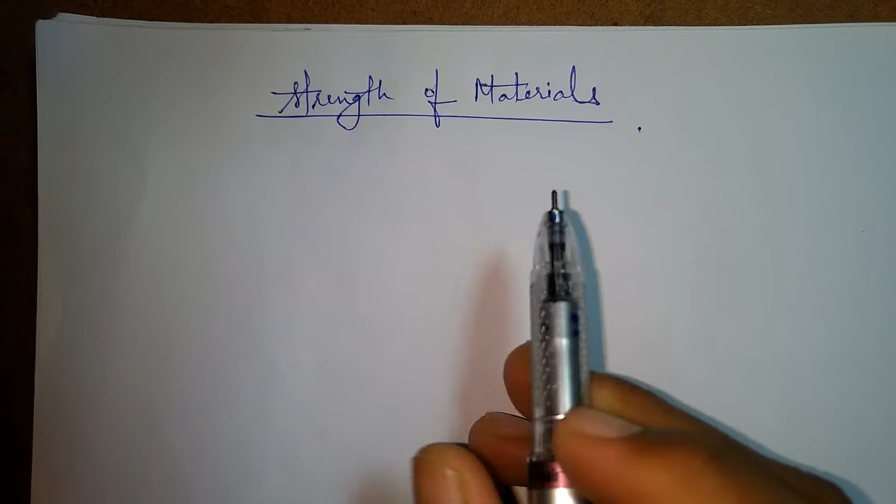So, hello everyone. Today we are going to learn about the basics of the chapter Strength of Materials, also called Mechanics of Solids. As we are engineers, it is in our hands to design, build, produce, manufacture, and use technology effectively in this modern world for our lives to go parallel with it.

As we all know, the situations or circumstances prevailing now are very much modernized. So, in order to cope with or go contemporary with the prevailing situations, it is in our hands to use the technology and use our knowledge efficiently, so there would be no failure.

So, coming to strength of materials, what is strength? Strength, as we all know, means the feeling of being strong, that we could do anything, or we could resist any attack. Yes, strength of a material means the resistance of the material to failure. Strength means the ability of a material to resist failure.

From observation, it has been known that the deformation occurs gradually. When external forces are acting on a body, the deformation occurs gradually and failure takes place. The deformation is not sudden, it is a gradual process till failure, then the failure takes place at a certain point. So, the study of the external forces, their effects, and the safe working conditions of the materials is called strength of materials. Moreover, these are mainly applied to metals only.

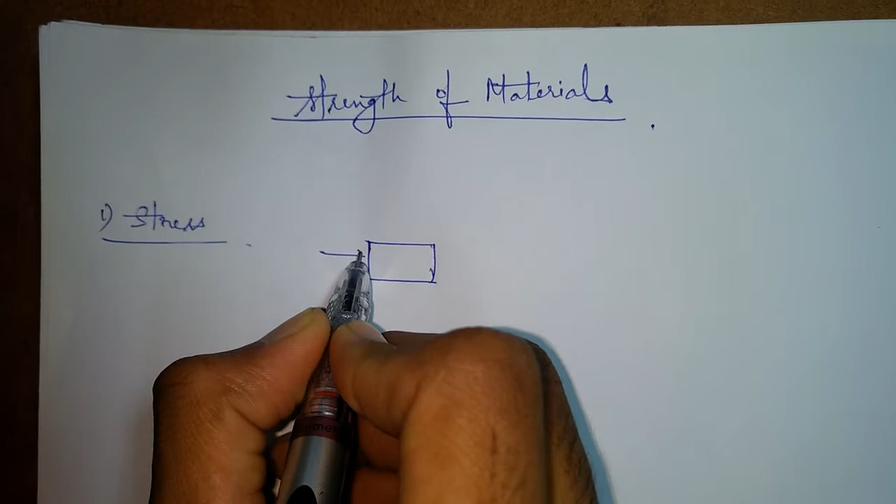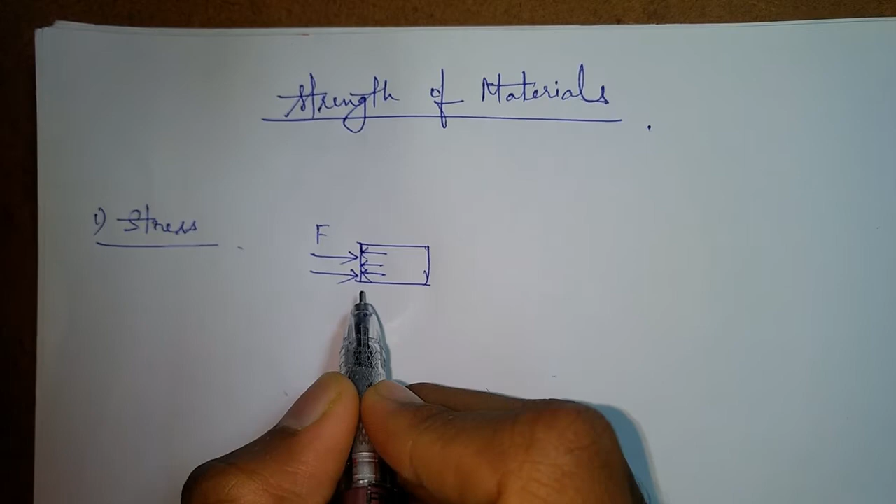As the external force is applied here, according to Newton's third law, for every action there is an equal and opposite reaction. The same applies here. For the external force being applied here, let this be F. There is a resistance developed in the interior of the body which resists the applied external force. This is nothing but stress developed in the body.

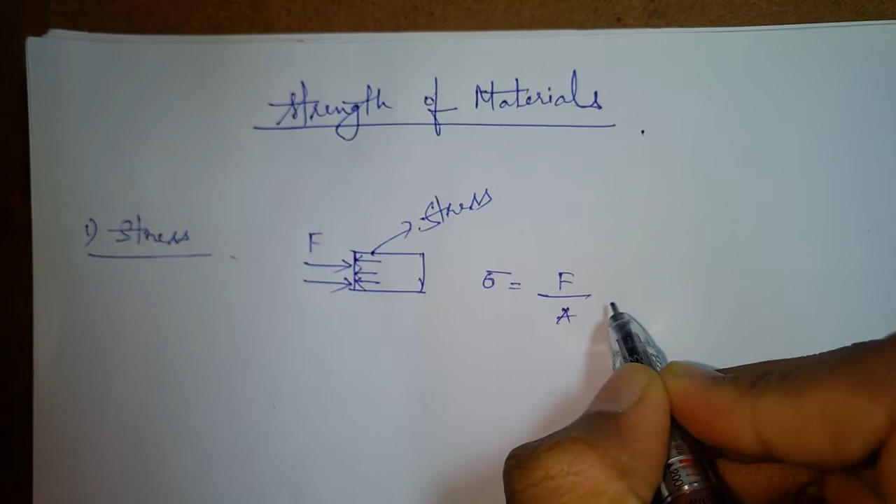Stress in common terms is nothing but resistance per unit area. Resistance that has been developed per unit area is called stress. It is represented by sigma. Stress is force per unit area, or P, load per unit area, and its units are Newton per meter square. So stress is nothing but resistance developed in the interior of the body for the external force being applied.

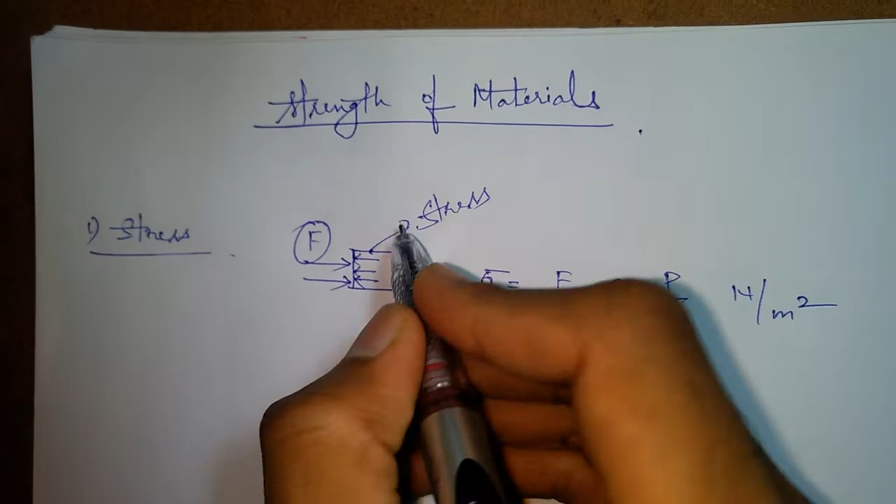If the force is greater than the stress, then deformation takes place. The body deforms. If the force is equal to the stress, then deformation does not take place, and the body will be firm as it was before. So it is called stress.

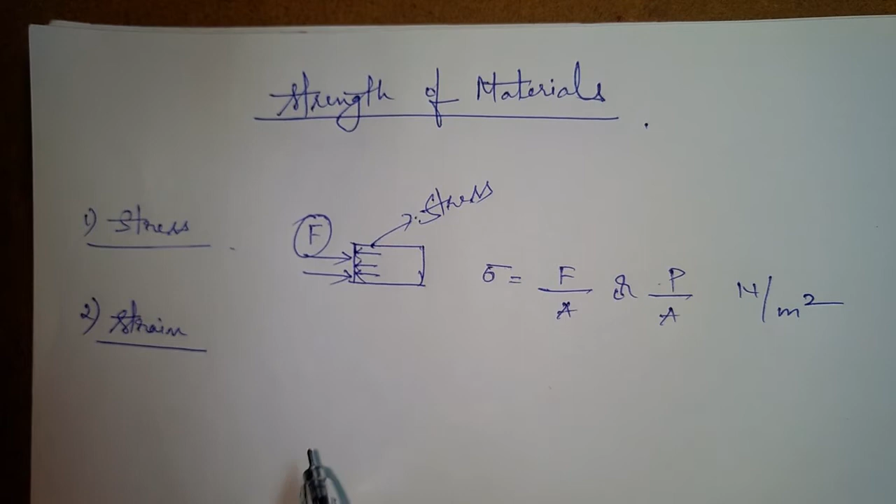Coming to the second one, it is strain. As we all know, if a force is applied on a body, deformation takes place. Suppose this is a body. Force is applied here at both the ends, so the body contracts like this, or the body may elongate like this from the original one, depending upon the force. So strain means the deformation per unit length occurred in the body.

So strain is written as change in length to the original length. Strain does not have any dimensions, as here it is length and here it is length. Both have the same units, those will be cancelled and it is unitless. So once again, strain does not have any units and it is dimensionless.

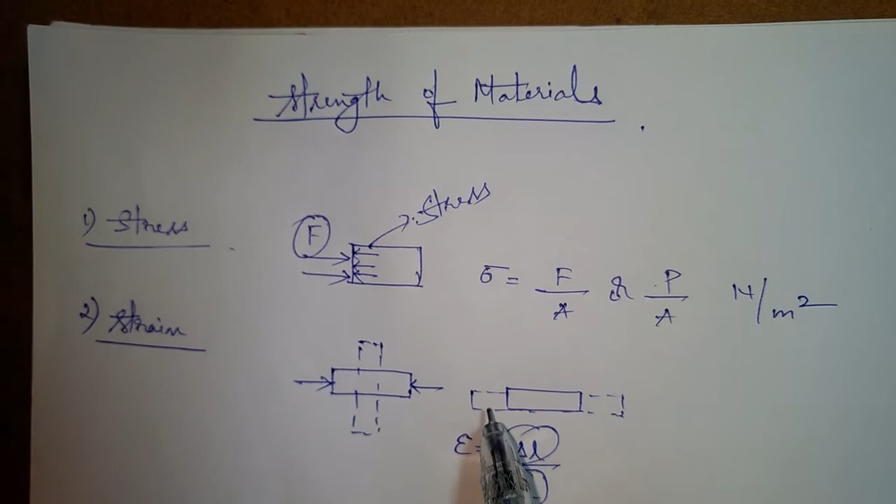So strain is nothing but change in dimension per unit length, or change in dimension to the original dimension. Now you got familiar with these two facts. Coming to elasticity.

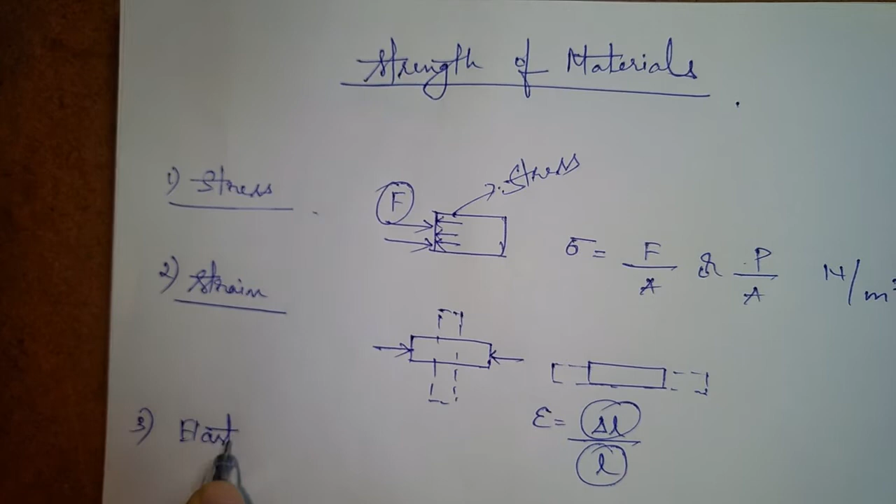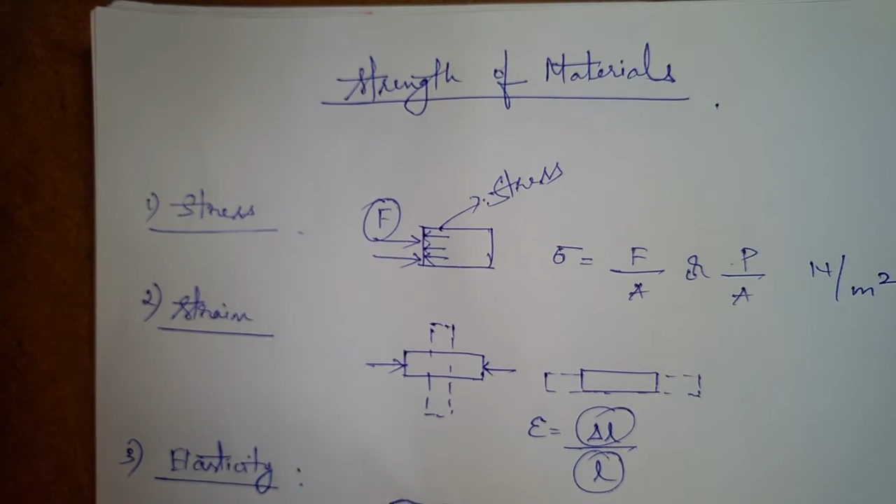What is elasticity? As we all know, if you take a rubber and elongate it, suppose it is a rubber. Sorry, the rubber looks like this. If we elongate it, as we all know, it elongates. If you remove the external force, it comes to its original position. So that property is nothing but elasticity. When the body returns to its original shape and size after the removal of external force, that property is known as elasticity. So it is a very familiar property for all of us.

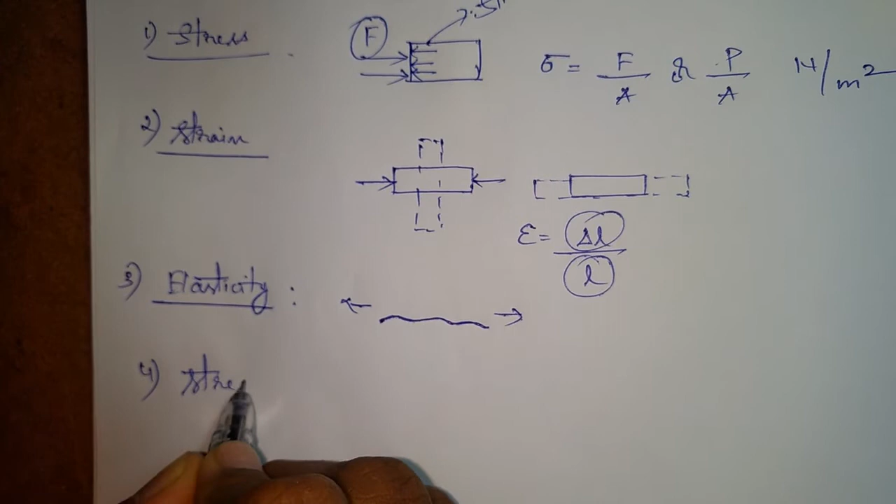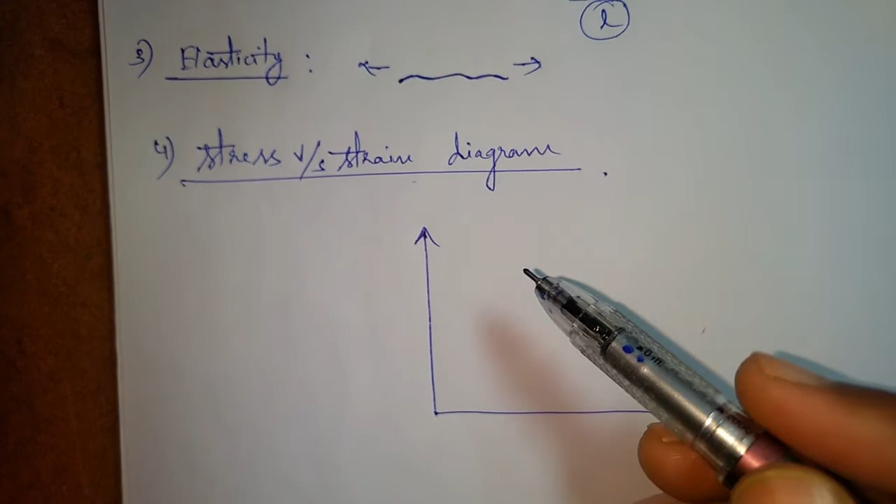So next, coming to stress and strain diagram. Stress versus strain diagram. So what is stress versus strain? Let's draw a graph here. First and foremost thing is, stress versus strain diagram varies for different metals. So it would be different for mild steel. It would be other for carbon steel, low carbon steel. Now I'm considering for mild steel.

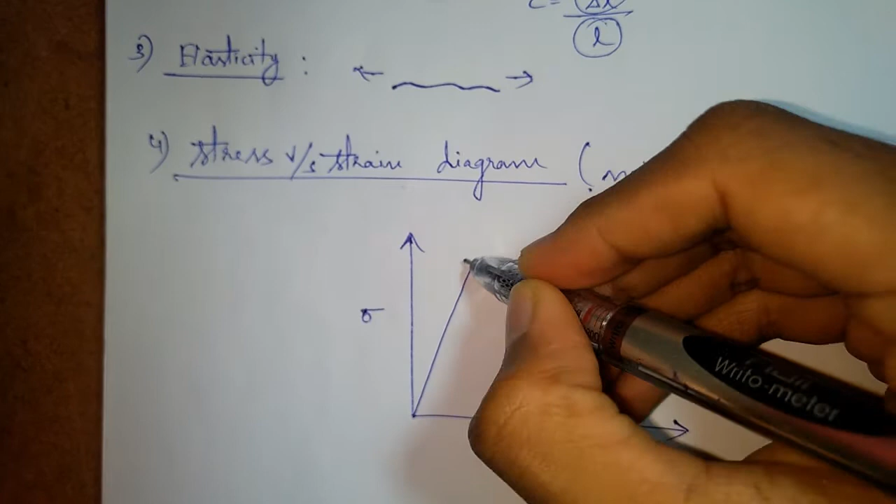For example's sake, this is stress and this is strain. As we see, the stress is directly proportional to strain to some extent, up to this point. So this is a stress strain curve, and it is the point of fracture. So naming it as A, B, C, D. So A here means elasticity limit. Here the stress is directly proportional to strain. Until here it is called elasticity limit.

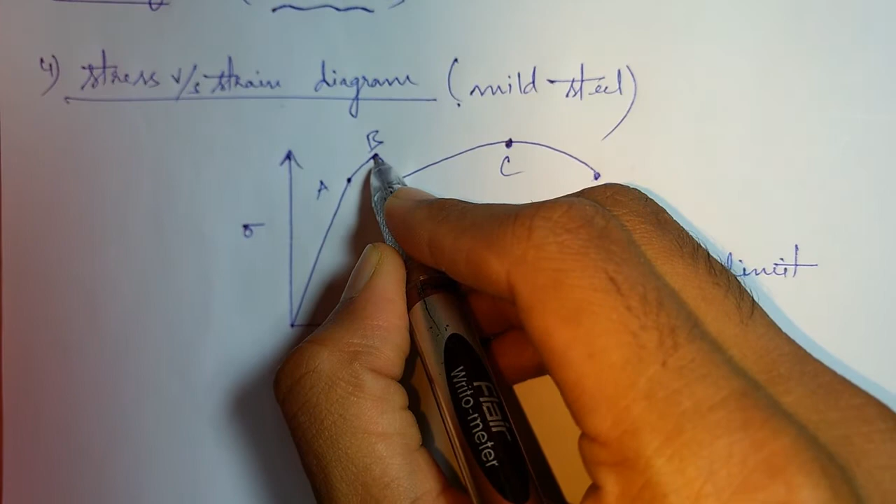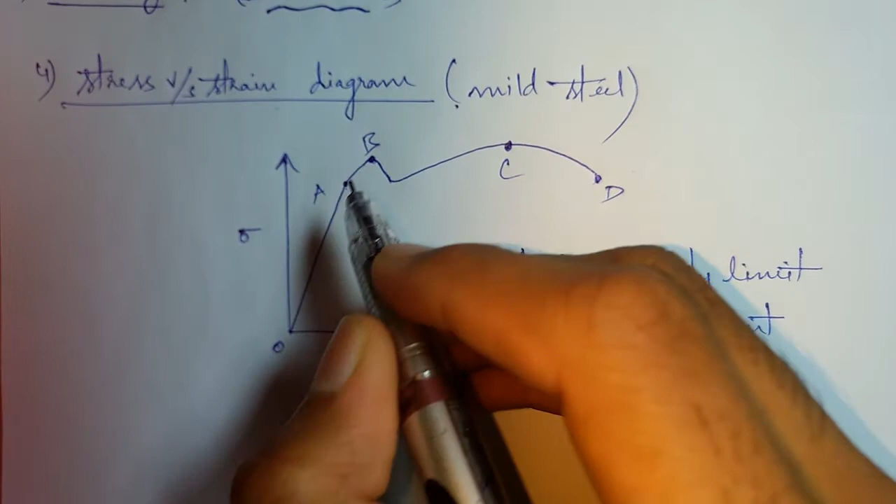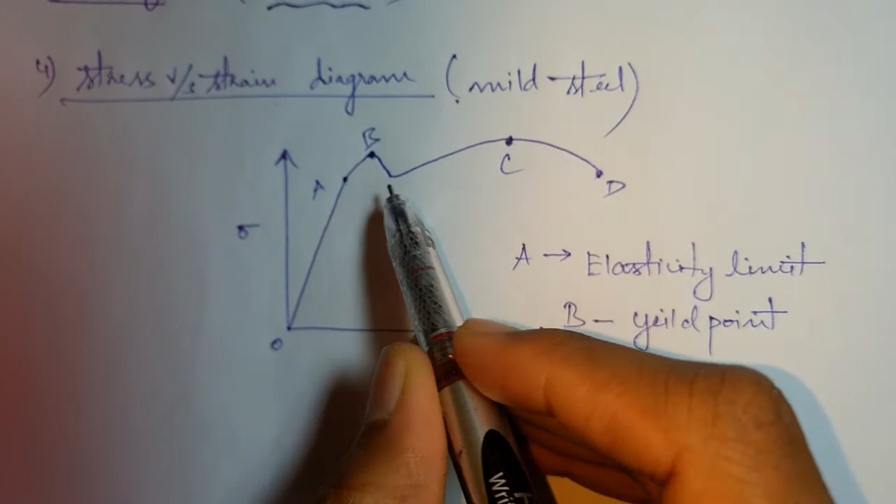Point B is called yield point. Yield point means from B the gradual deformation occurs plastically. This is 0. From 0 to A, when the load is applied, the body deforms within the elastic limit elastically. Means if the external forces are removed, then the body regains its original shape and size. So after B, when the load continues on the object, then the body deforms plastically. Point C is called ultimate strength. And point D is called fracture point.

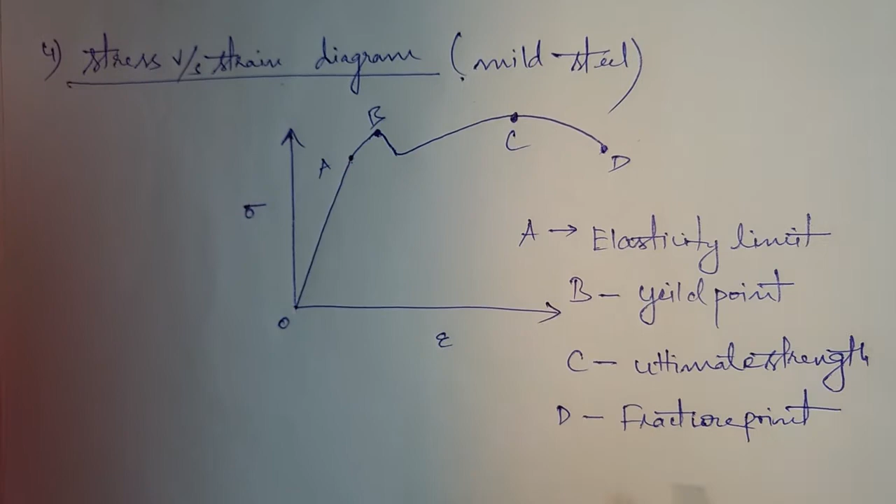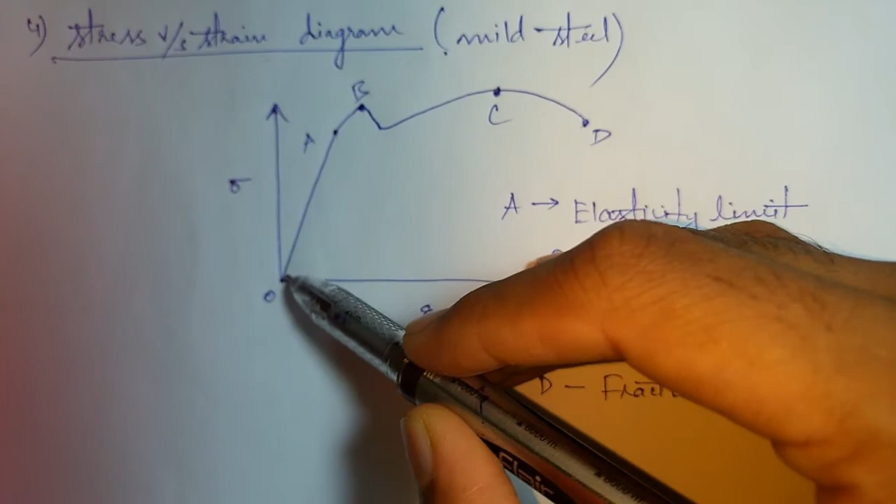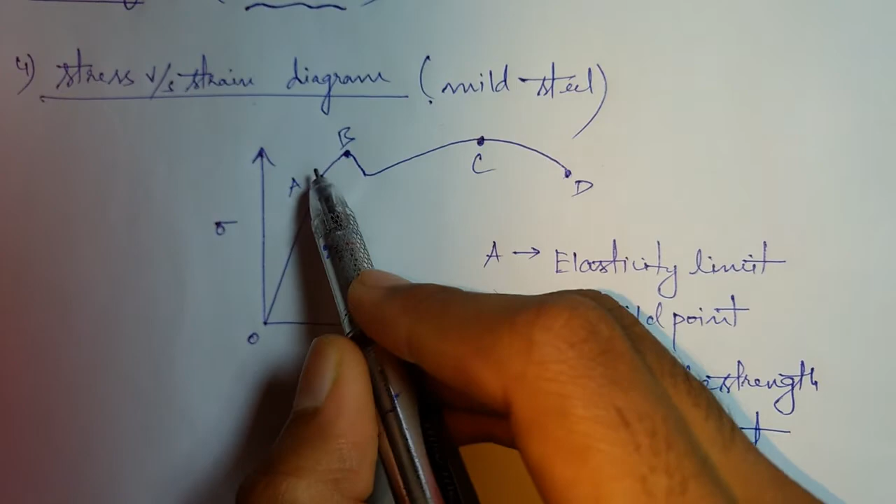So understanding the diagram, it is the stress versus strain curve of mild steel. As the load is applied on the object, the stress strain curve shows a linear curve. Means stress is directly proportional to strain under elastic limit, that is point A. Again, when the load applied is continued gradually, it attains point B, which is called yield point. After yield point, the body gradually deforms plastically. Before yield point, the body deforms elastically, means it would regain its original shape and size after the action of external forces. But after the yield point B, the body deforms plastically. That means it does not regain its original shape and size.

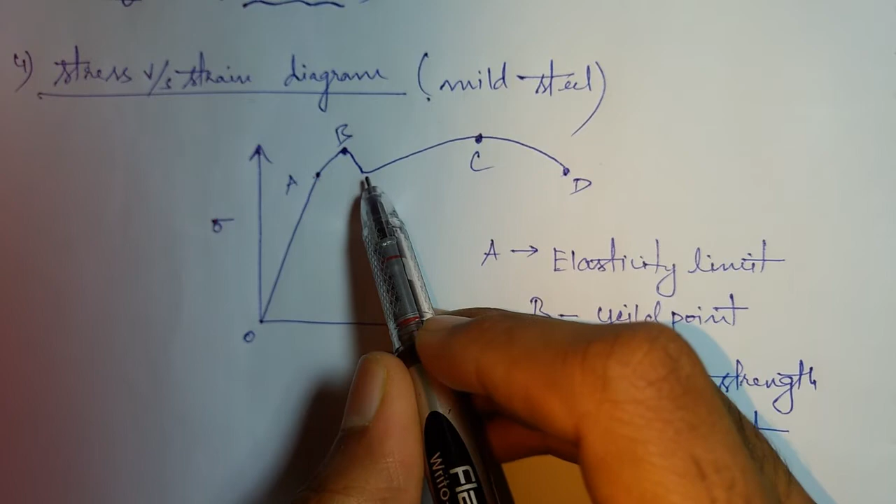When the load applied continues gradually, then the point C would occur, which is the ultimate strength. Means it is the ultimate point at which the body could take the load. When the load is applied continuously again, it would reach the point D, which is called a fracture point, or the point of failure, where the body finally breaks or fails. So it is the stress strain curve of a mild steel.

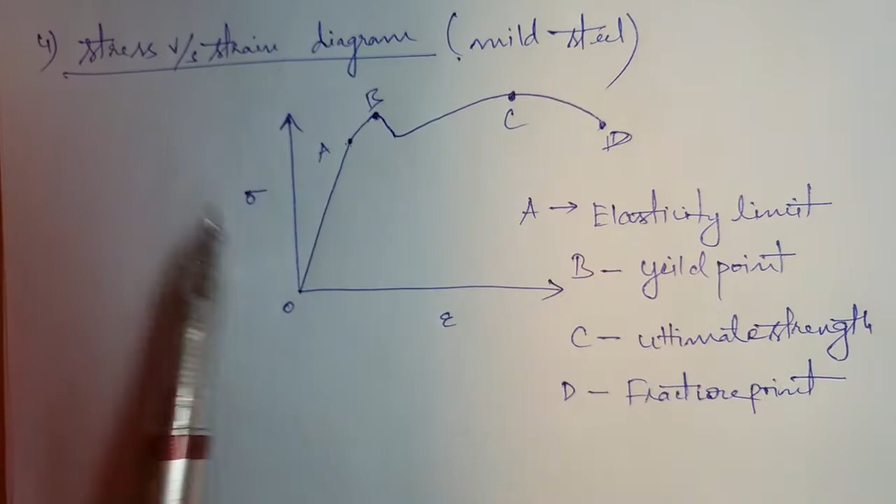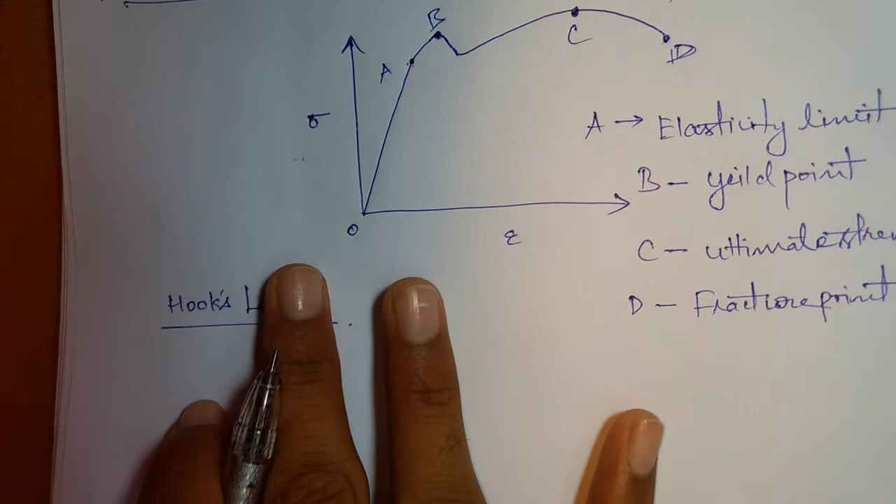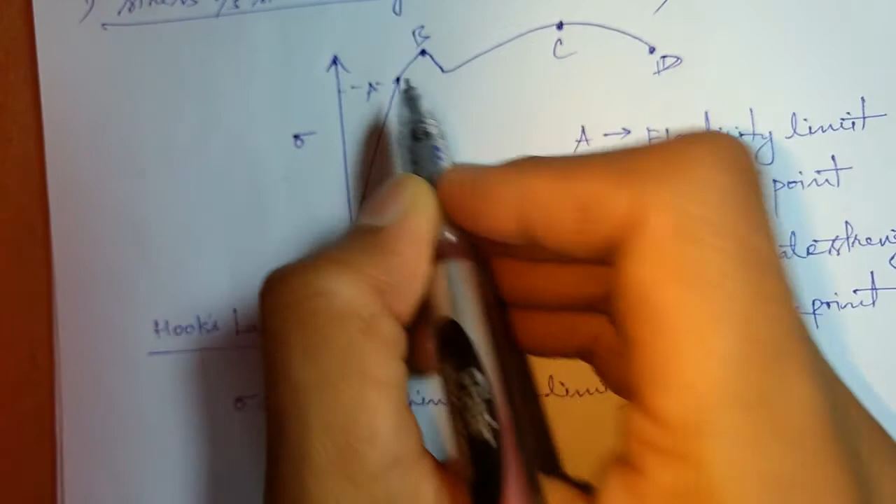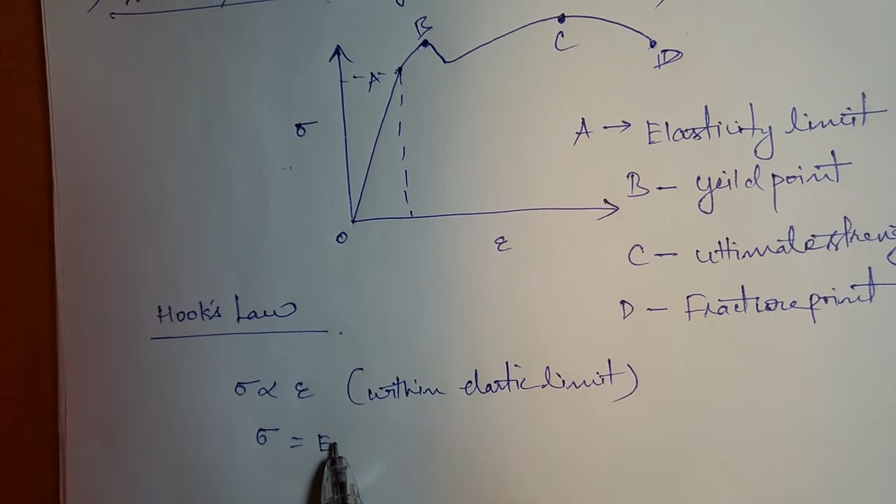So coming to Hooke's law. Hooke's law is nothing but stress is directly proportional to strain within elastic limit. It is called Hooke's law. So if we draw two perpendiculars at the elastic limit, this is the strain, this is the stress. I would explain the significance of it. So if we remove the proportionality, then it would become a constant. This E is called modulus of elasticity. Hooke's law states that stress is directly proportional to strain within the elastic limit. It is called Hooke's law.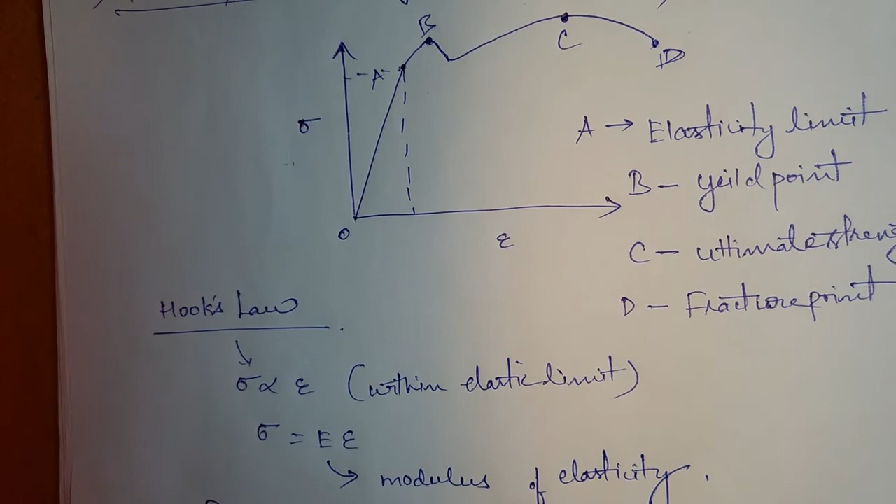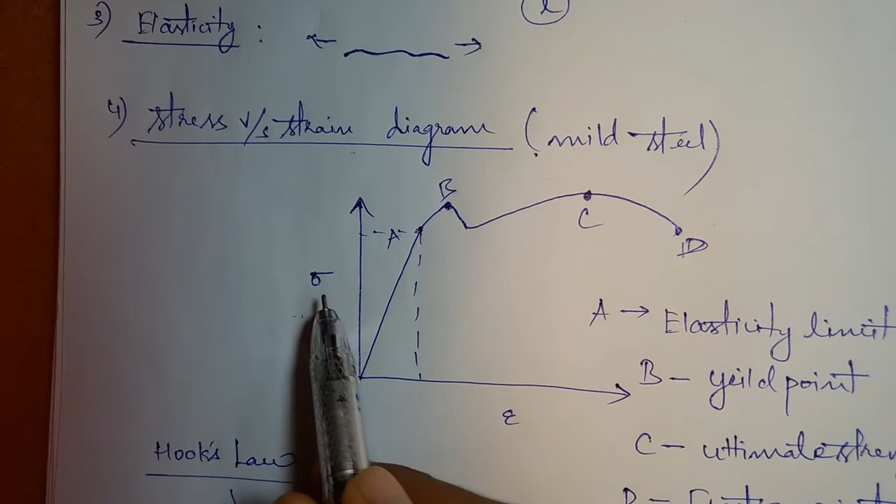Coming to resilience. What is resilience? As you have seen here in the stress strain curve, this is stress, this is strain. Stress is directly proportional to strain within the elastic limit. It shows a linear curve. So resilience means the energy stored within the body under elastic limit. The energy stored when the load is applied on the body, under elastic limit, is called resilience. So how to find out resilience?

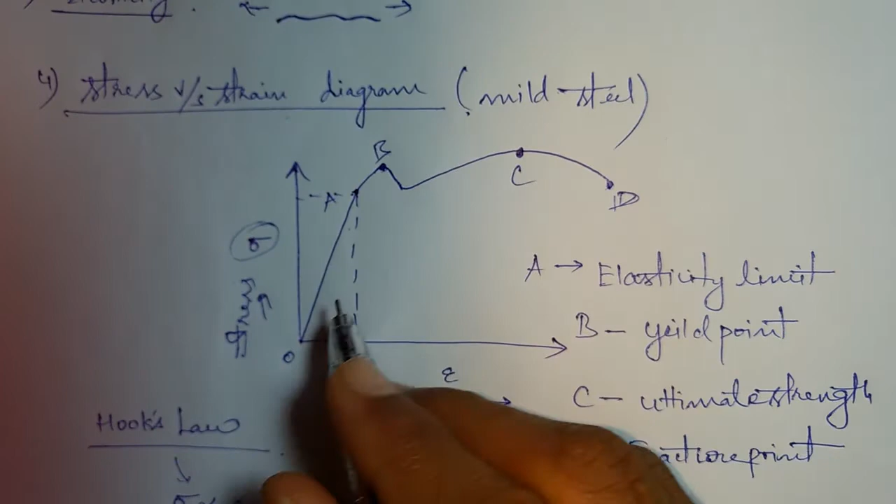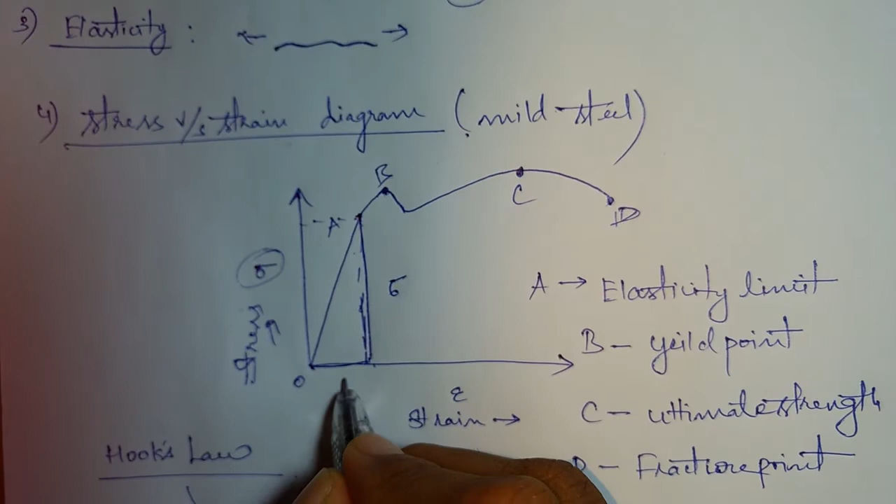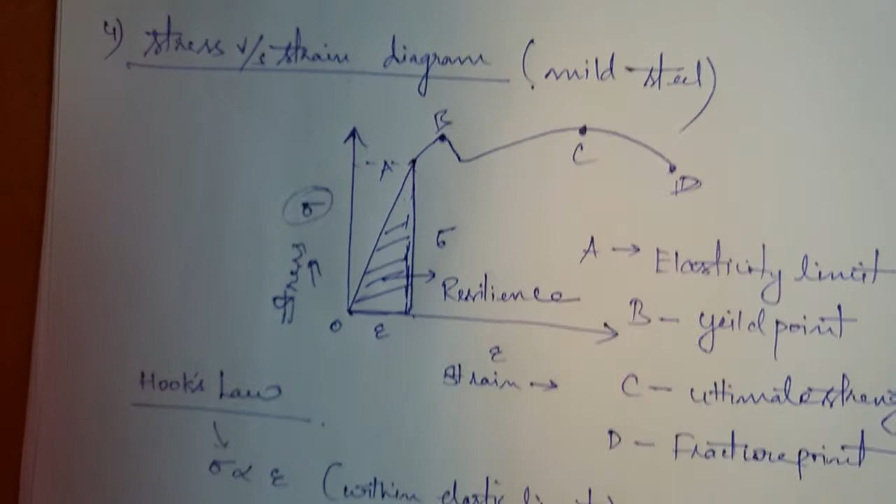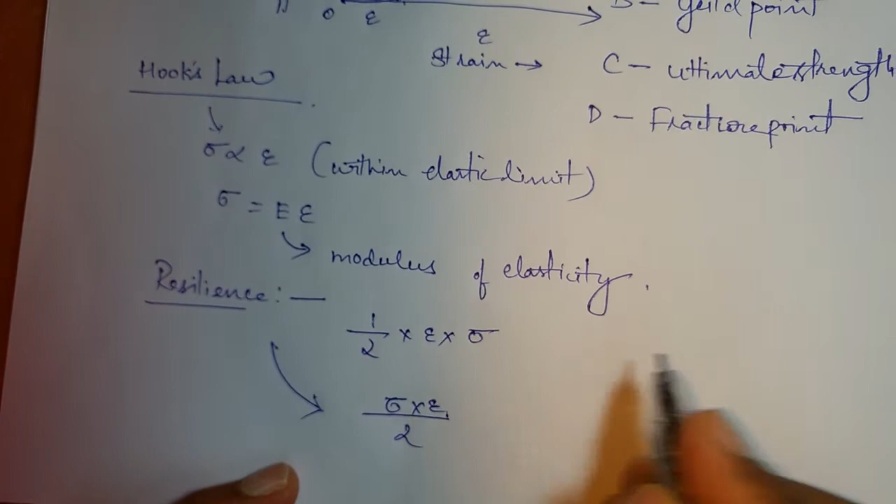Resilience is nothing but, take this triangle. As we all know, this is stress and this is strain. So the area of this triangle is called resilience. So resilience is half, base is strain, height is stress. So sigma into strain by 2. This is called resilience. Now you got familiar with the stress strain curve, Hooke's law, and resilience. Hooke's law is when stress is directly proportional to strain within elastic limit. If we remove the proportionality, we get the constant known as modulus of elasticity. And resilience is energy stored within the body under elastic limit. So I think it is clear till here.

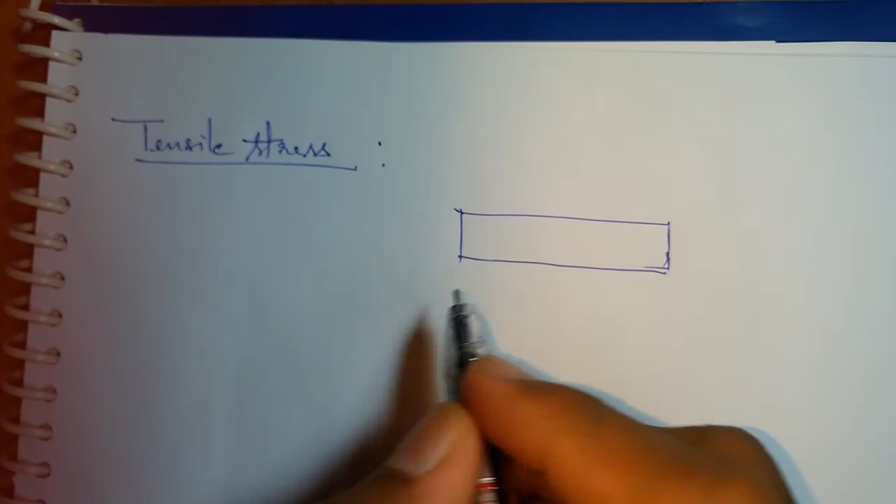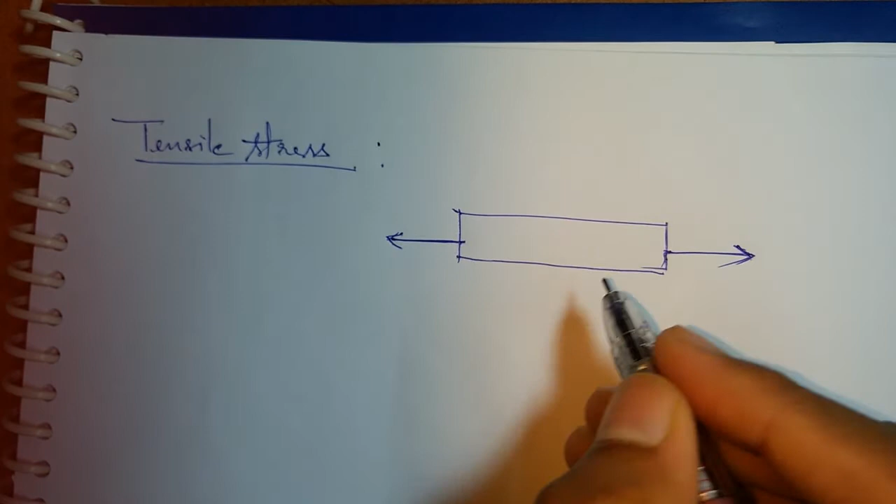So coming to some stresses. So first we take tensile stress. What is this tensile stress? Suppose we take a body. If we apply two equal and opposite forces in opposite directions, then the body elongates. It becomes like this.

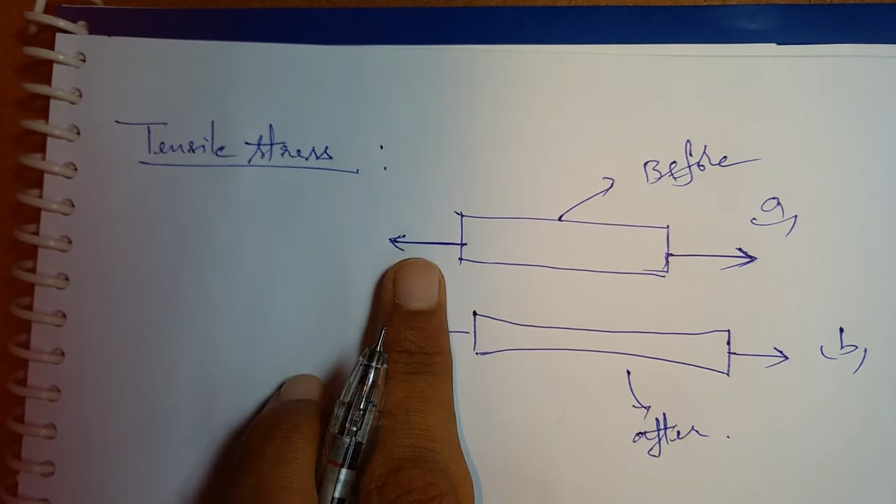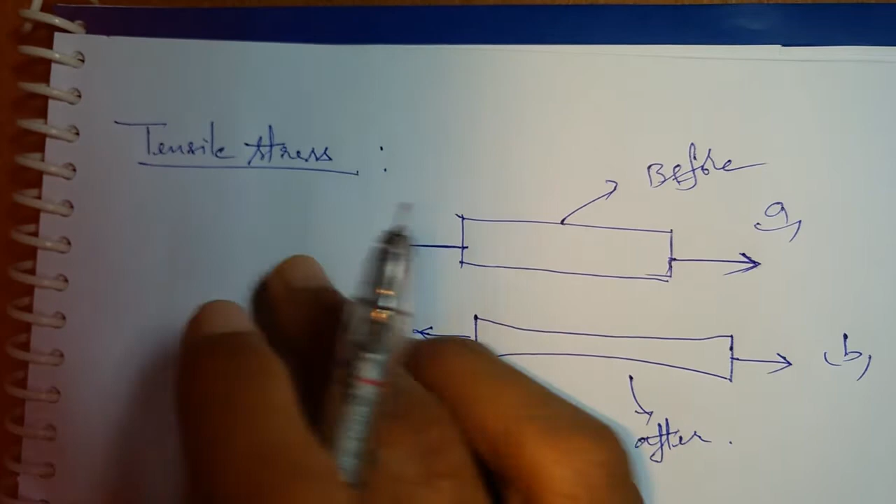Before, after. So this is called tensile. If we apply two equal and opposite forces at both the ends, it is called tensile force, and the stress developed corresponding to tensile force is called tensile stress. So the corresponding strain is called tensile strain.

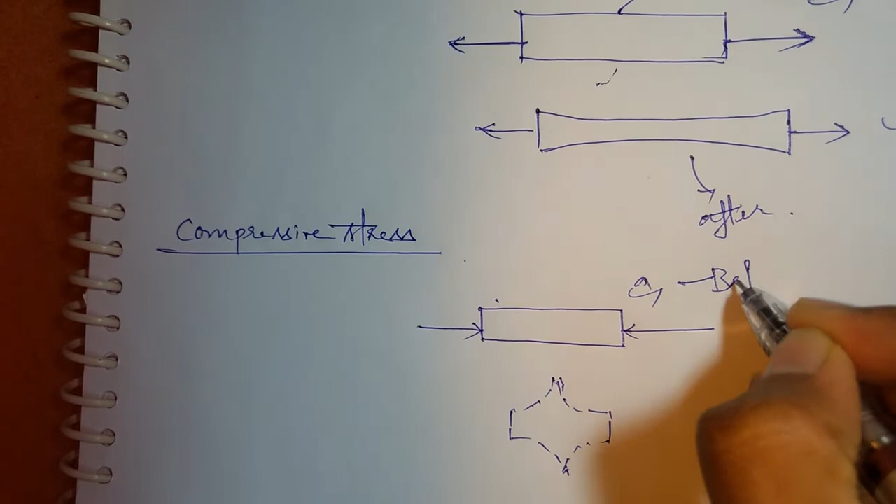Now coming to compressive stress. So let us take a body. If two equal and opposite forces are acted in the same direction, then the body tends to compress, means it would become somewhat like this. The cross section area increases. Yeah, it's a rough figure. This is before and it is after.

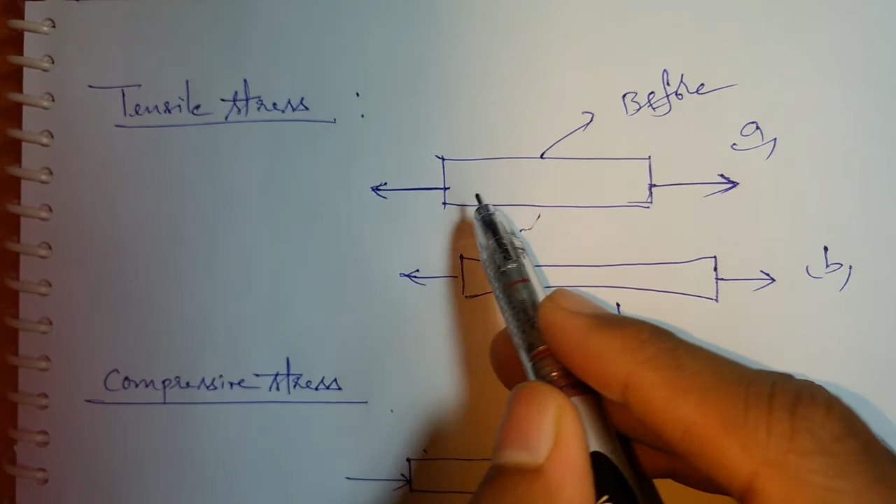So it is called compressive force, and the stress developed within for the corresponding compressive force are called compressive stresses. So the corresponding strain is called compressive strain. So when the two equal and opposite forces are acted against each other in opposite direction, it is called tensile force, and the corresponding stress and strain are called tensile stress and tensile strain. When two equal and opposite forces are acted in the same direction, then the force is called compressive force, and the corresponding stress and strain are called compressive stress and compressive strain.

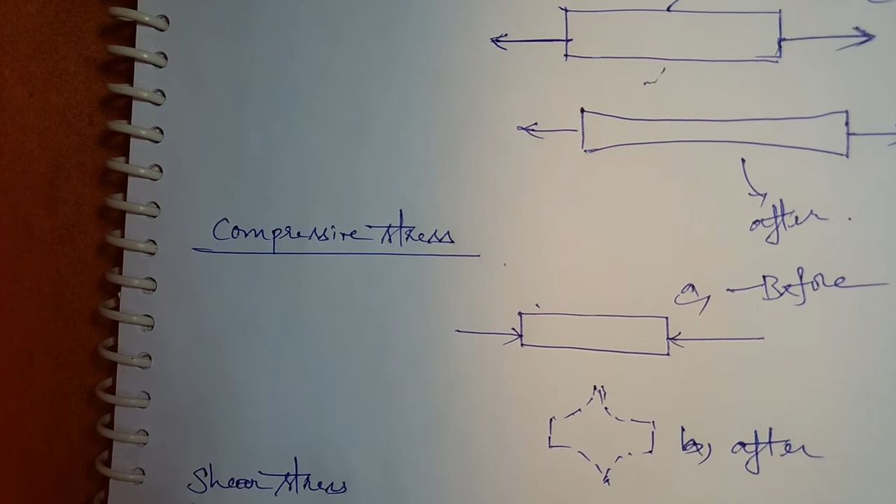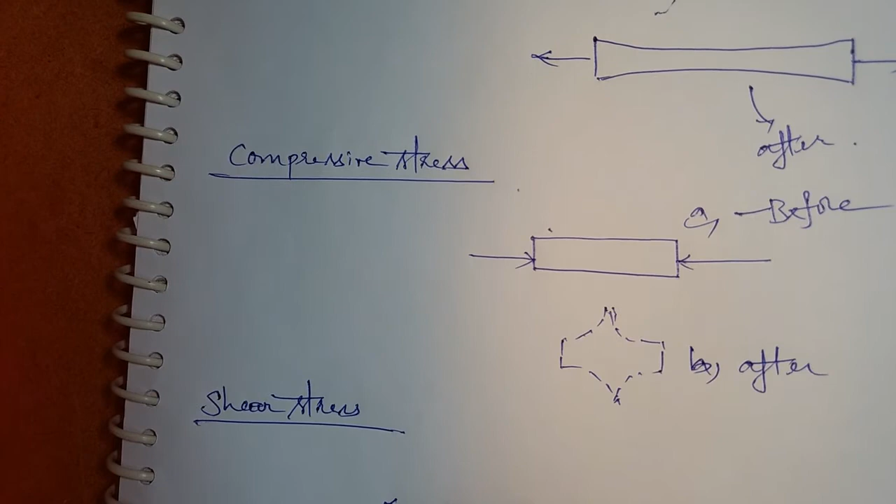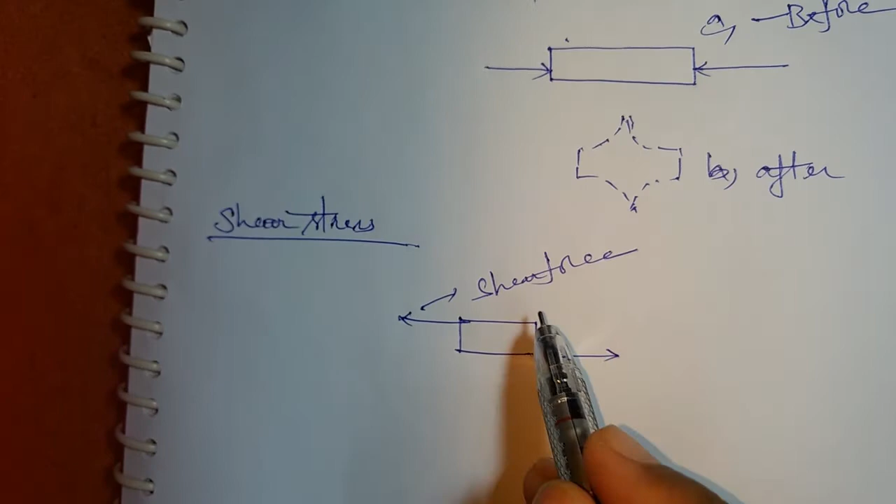So coming to now shear stress. Let us take an object. If two equal and opposite forces are acting at the tangential surface of an object, then the object is in shear. So these are called shear forces. When two equal and opposite forces are acting at the tangential part of the body, then the force is called shear force. Then the stress developed would be shear stresses, and the strain would be shear strain.

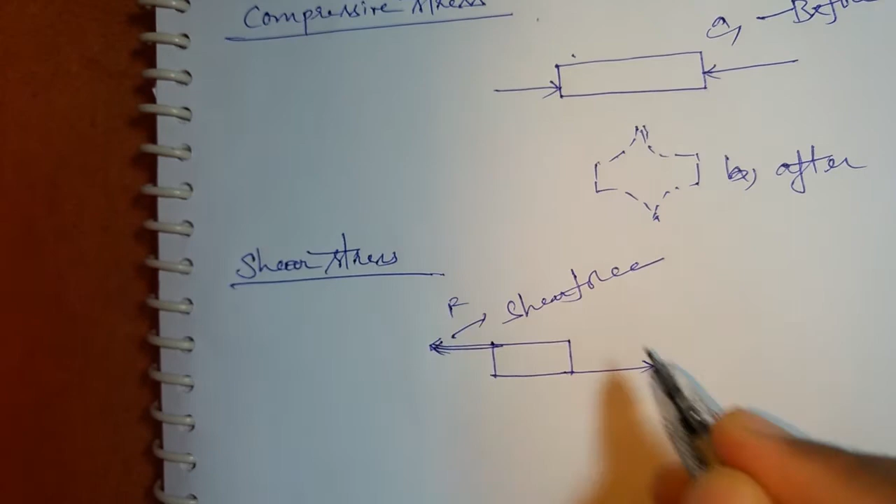So now you are familiar. See, two equal and opposite forces F are acting on the tangential part of the body. Then the object tends to shear in both the directions. Then the stress developed are shear stress, and the corresponding strain is called shear strain. So moreover, what is modulus of rigidity? Modulus of rigidity is nothing but shear stress by shear strain. The ratio of shear stress and shear strain is called modulus of rigidity.

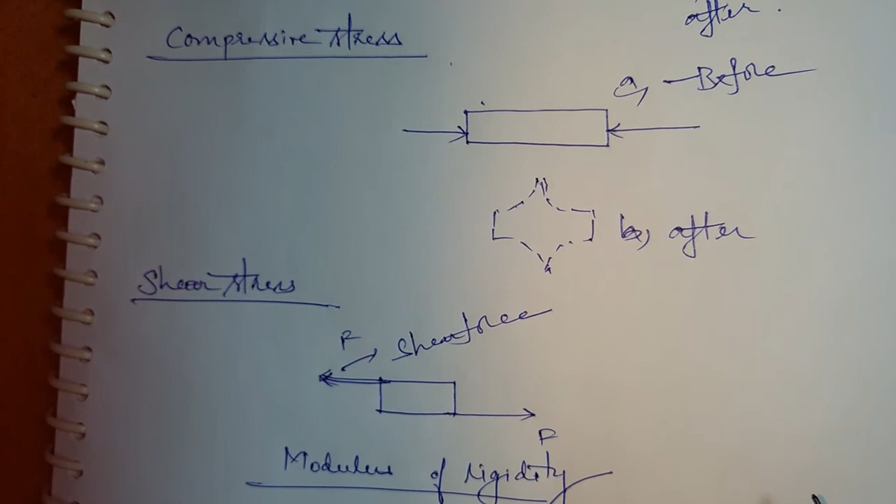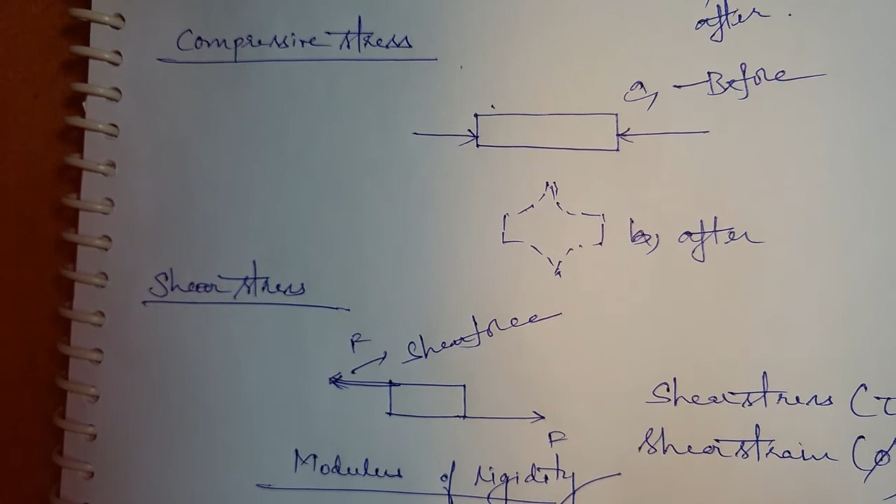See, shear stress is represented by tau. Shear strain, phi. So tau is directly proportional to phi. So tau is equal to G into phi. G is equal to modulus of rigidity. Sorry, here, modulus of rigidity. Tau is directly proportional to phi. If we remove the proportionality constant, it would become G. G is nothing but modulus of rigidity.

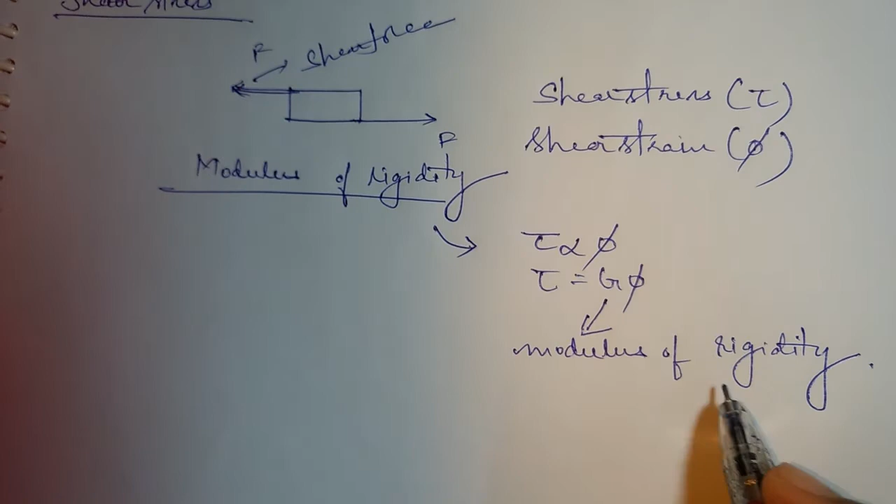So coming to bulk modulus. For understanding bulk modulus, we should understand volumetric stress and strain. Suppose let us take a cube. If it is immersed in water, then it would experience perpendicular forces from all directions on its faces. So it would compress volumetrically. So these forces are called volumetric forces, and the stresses developed within are volumetric stresses. And the corresponding strains are called volumetric strain.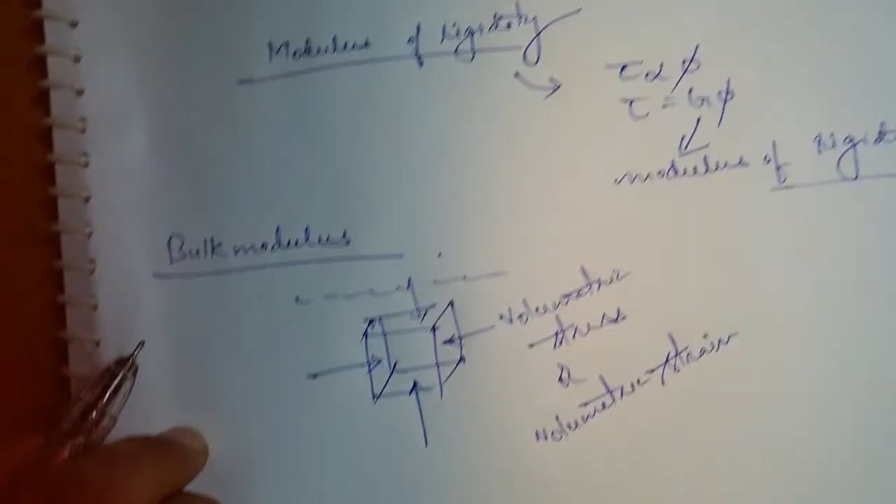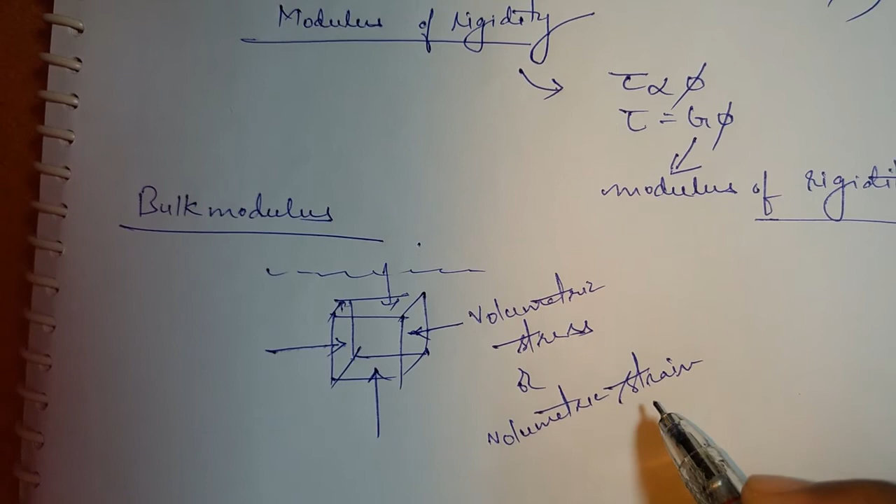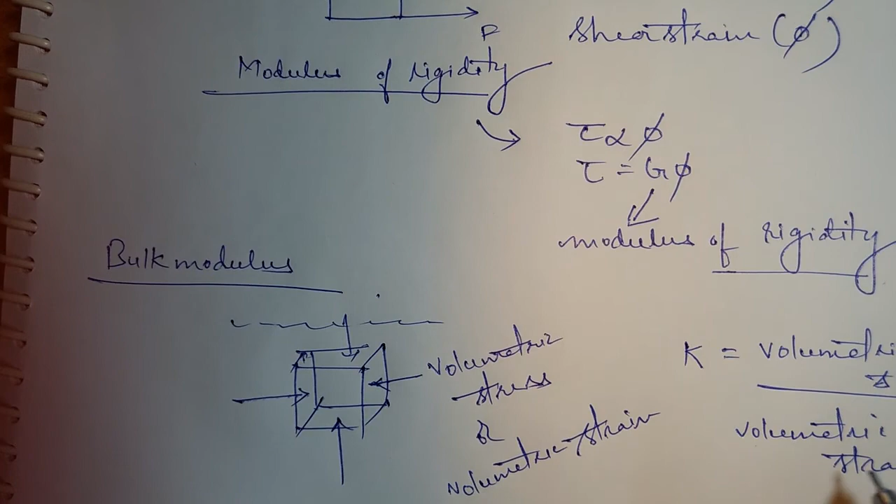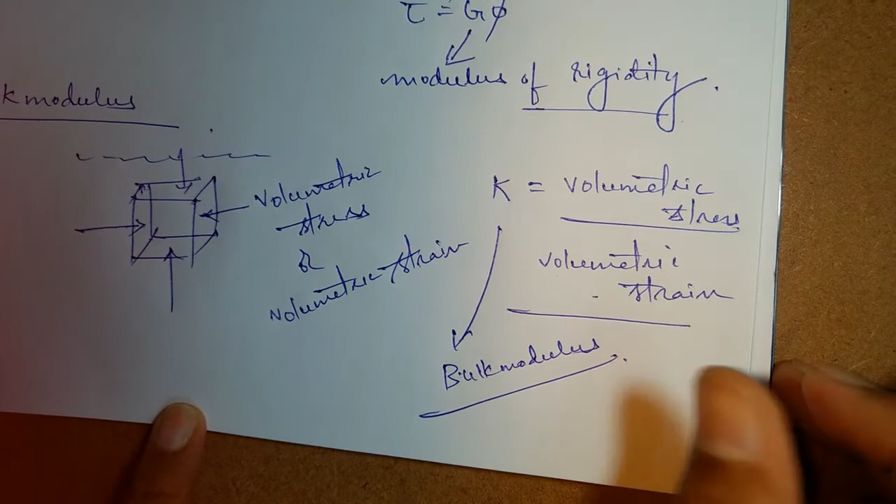Volumetric strain. So if a body is immersed in water, then it would experience perpendicular forces on all its faces equally. Then the corresponding stresses developed are called volumetric stresses, and the corresponding strain is called volumetric strain. So what is bulk modulus? Bulk modulus is a ratio. Bulk modulus is represented by K, is equal to volumetric stress by volumetric strain. It is called bulk modulus. Now you got the picture of bulk modulus.

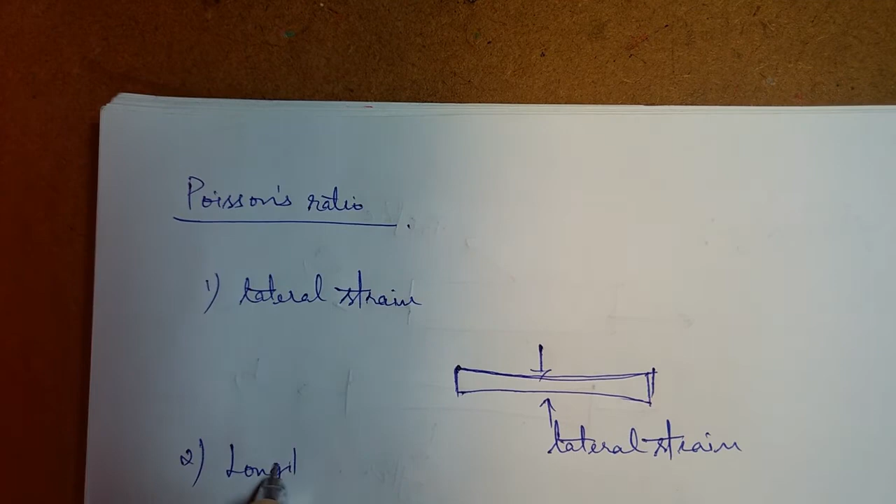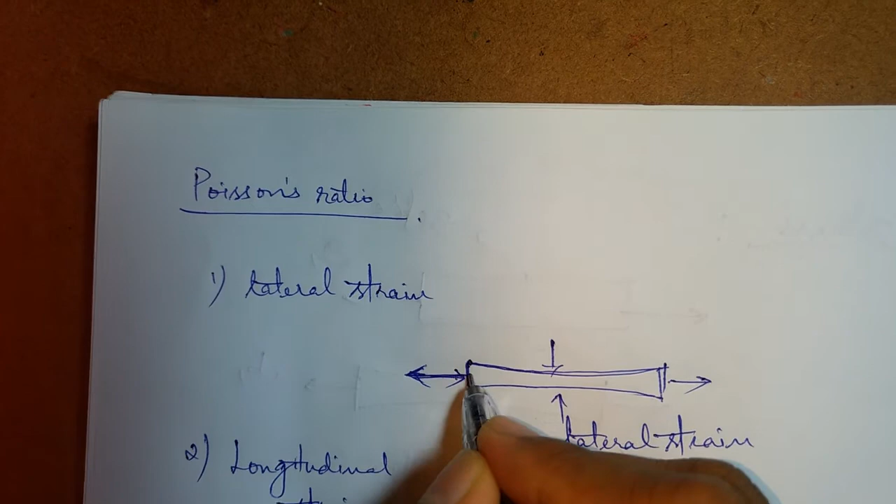Coming to Poisson's ratio. What is Poisson's ratio? To explain Poisson's ratio, we must know about lateral strain and longitudinal strain. First, lateral strain. Suppose a body is elongated, as in case of tensile forces. The strain developed laterally or in transverse direction is called lateral strain. And the strain developed longitudinally, here, like this, is called longitudinal strain.

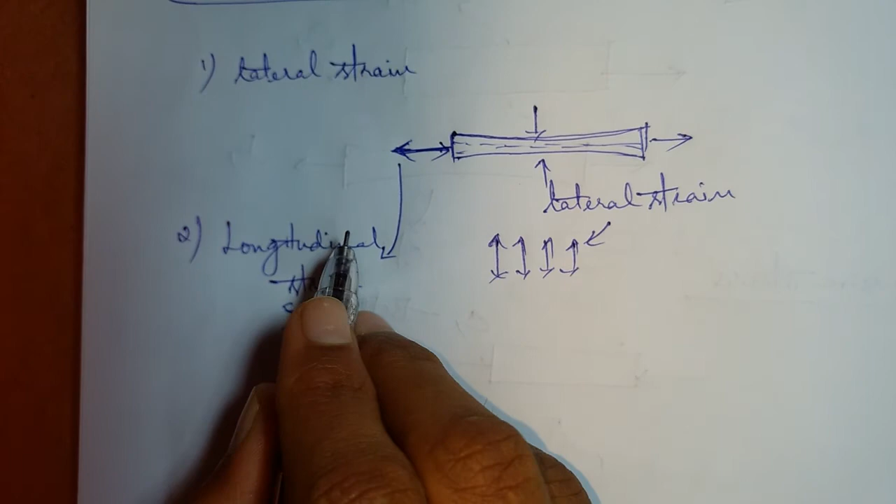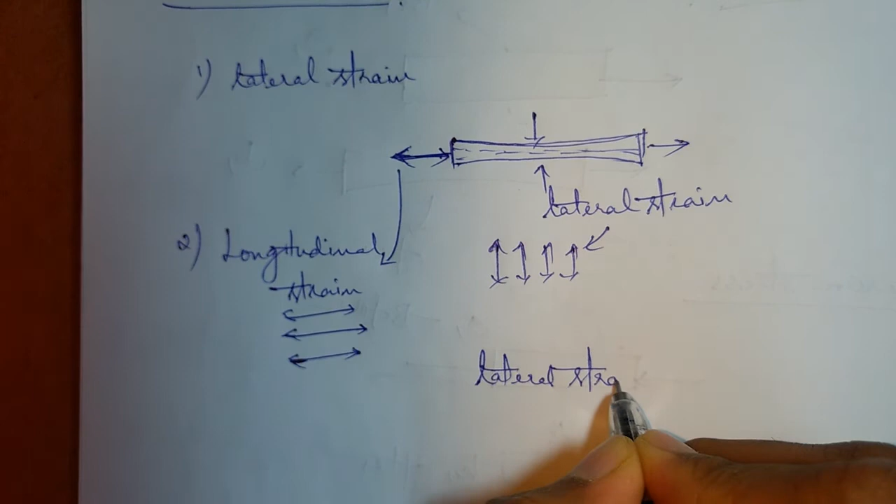So laterally means transverse. Strain developed in this direction is called lateral strain, and this direction is called longitudinal strain. So Poisson's ratio is nothing but lateral strain by longitudinal strain.

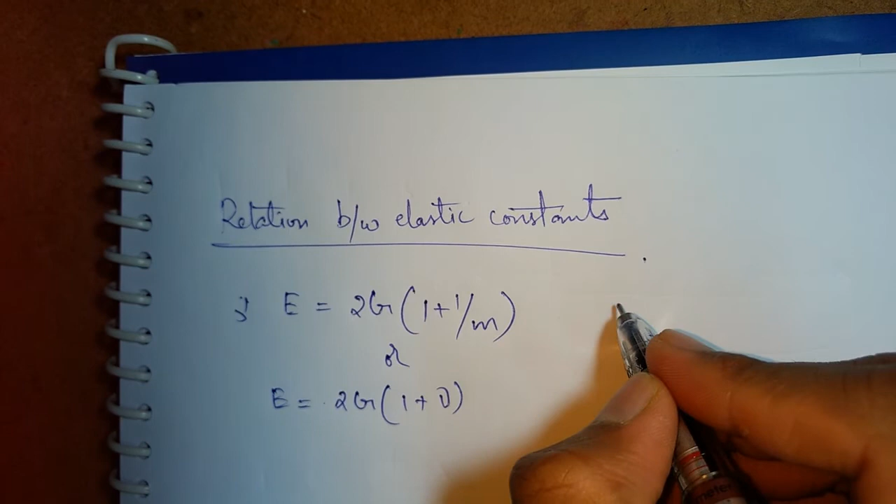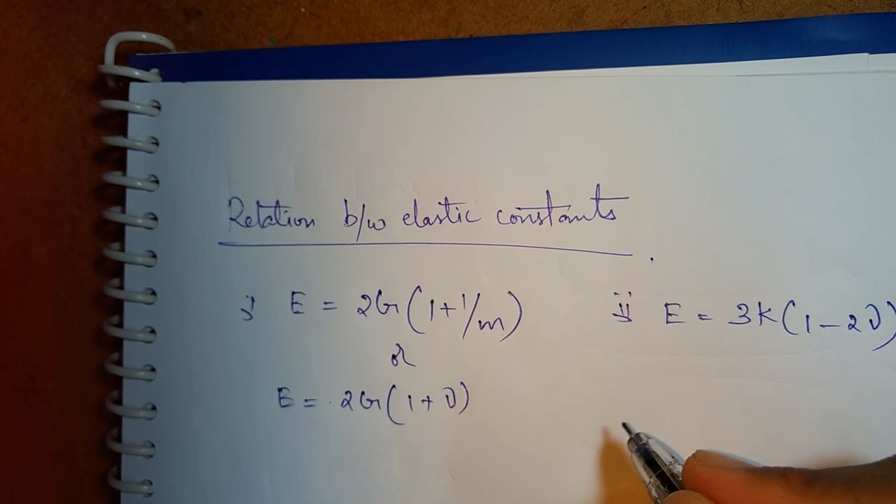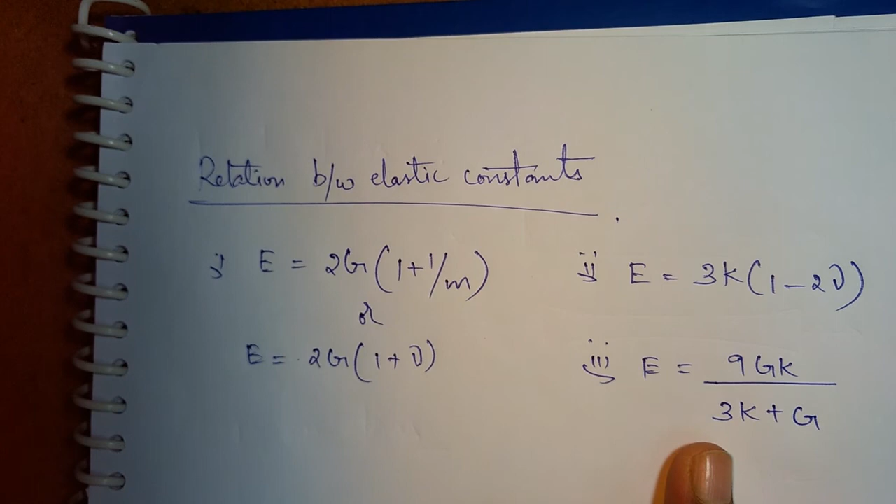So coming to the relation between the elastic constants. First one, E is equal to 2G into (1 plus 1 by m), or 2G into (1 plus nu). Second one, E is equal to 3K into (1 minus 2 nu). And third one, E is equal to 9GK by (3K plus G). So these three are the relations between the elastic constants, that is modulus of elasticity, modulus of rigidity, and bulk modulus.

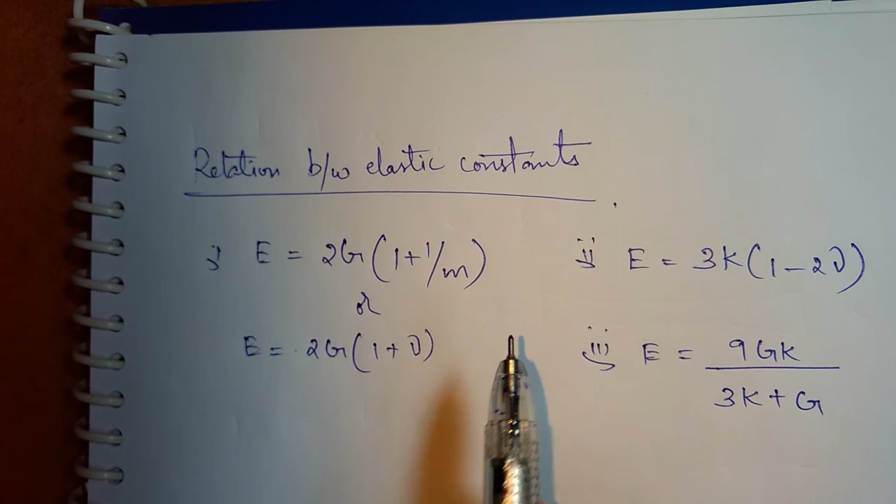So hope you have gained knowledge about some basics of this chapter, strength of materials, that is stress, strain, stress-strain curve, elasticity, Hooke's law, shear stress, volumetric stress and strain, Poisson's ratio, and all.